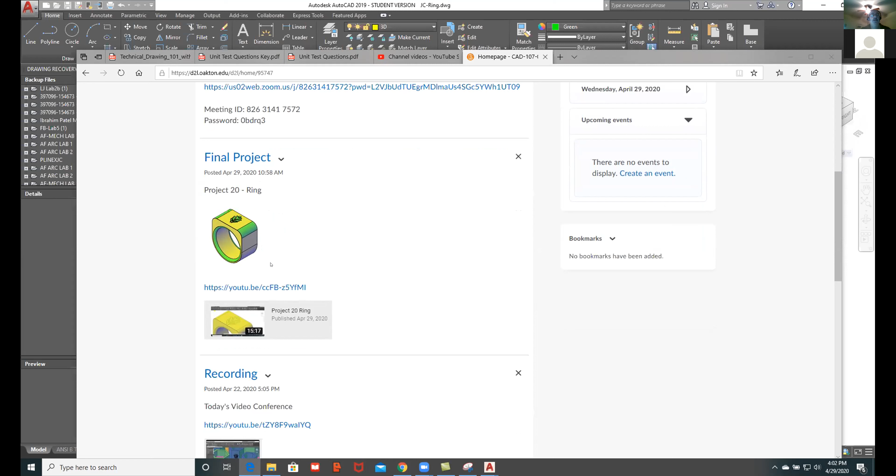We're working on this final project, project 20, the ring project from the 3D printing projects book. I've created a video for it, but I'll need to add one more part because I had a crash while showing how to put the logo on it—though it's not that difficult. I'll put a project file that students can work with for project 20, and add that after this video broadcast meeting.

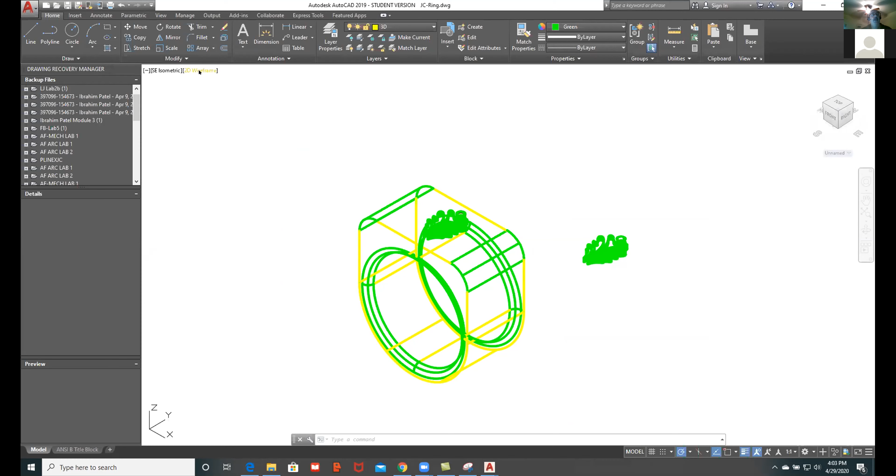If we look at the project itself, I'm using AutoCAD for it, and I'm going to put it back over into conceptual. That's kind of the finished project, and what I thought would be interesting would be to put an insert on it. So I'm going to have Alan talk about how to do an insert and slice that CAD model.

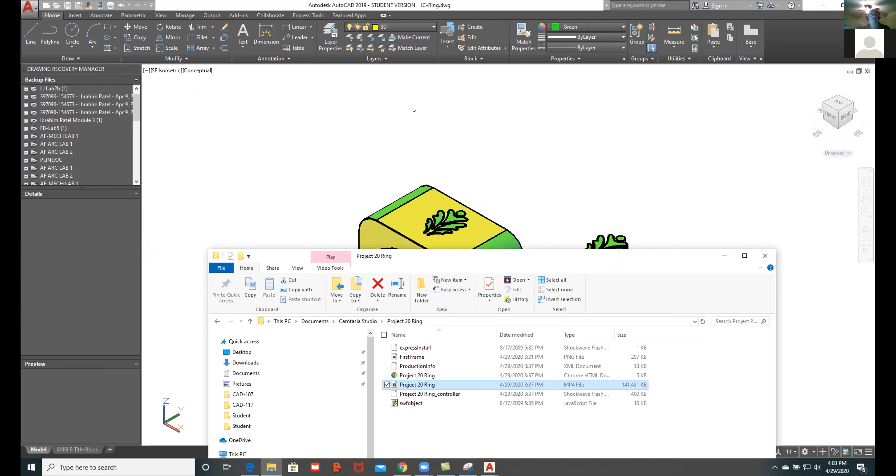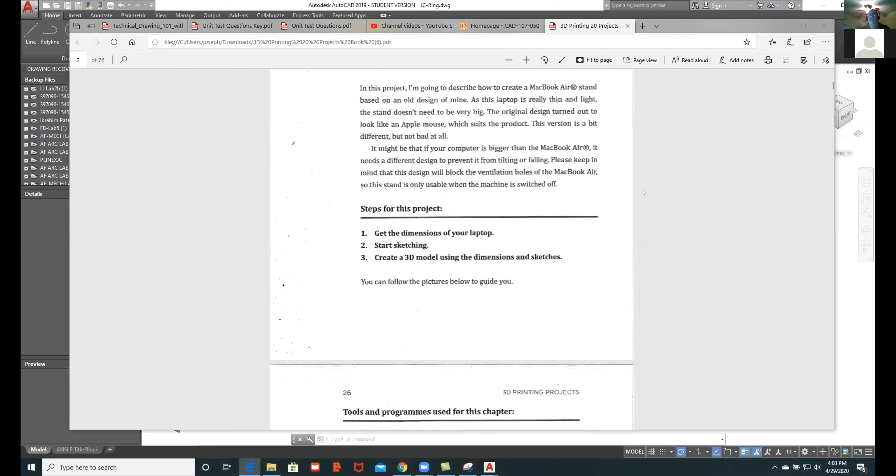So the way this one is set up, if we look at the curriculum for it—I'm going to have to go back and get it. So this is project number 20, and it's a real basic shape.

What I like about this project is that a lot of people use CAD for jewelry design. I've had a number of students—I guess it's not a lot, but a significant number of people doing that. Being able to use 3D printing is pretty cool too, though I think his design is a little too fundamental; it just looks like a giant Lego to me. But when you get into some of the other things, you can do some pretty cool stuff.

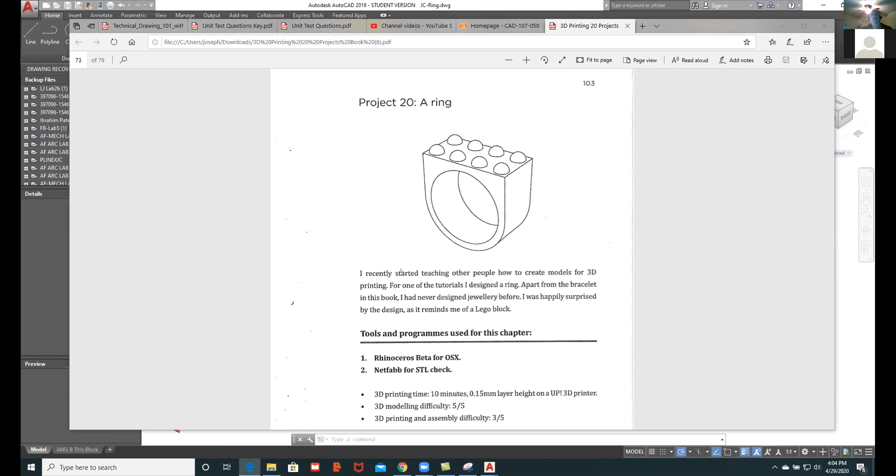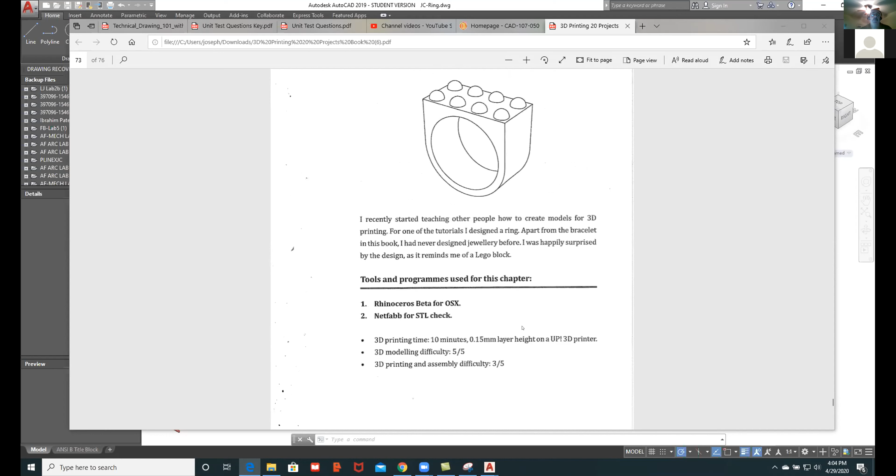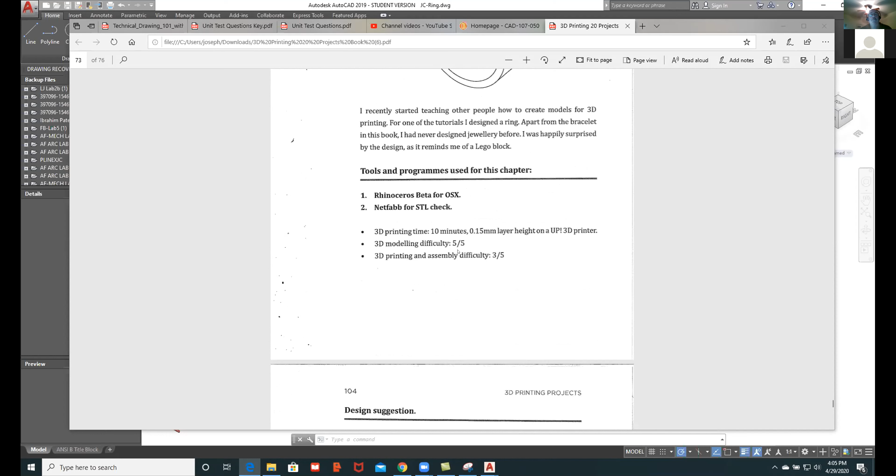He's using Rhino, which is a great software—they have industrial design applications for jewelry design, using CAD-CAM. Then he's using Netfabb for the STL, basically just printing it on a 3D printer with a rough resolution of 0.15 millimeters.

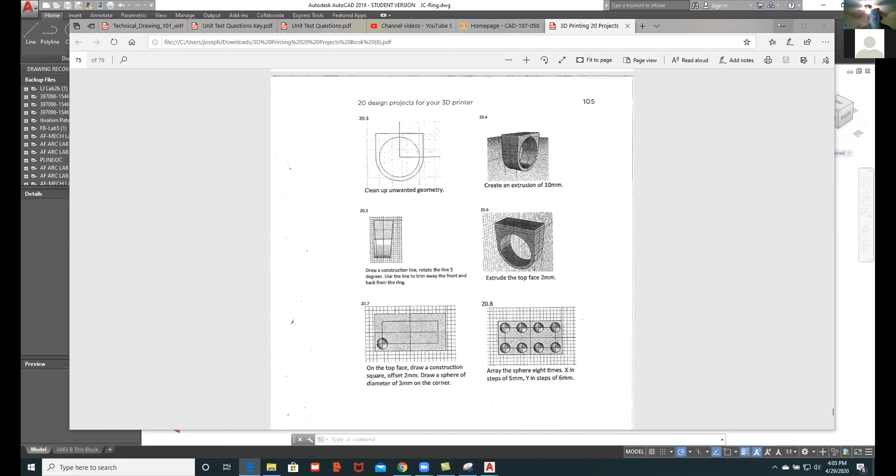What I've done is gone through and laid out how to do this with AutoCAD. I have an AutoCAD file here, and in this file I go through step by step like in the other videos. I'm going to turn off the conceptual view because I've had some bad luck today with the screen freezing. I just trace it back step by step until I get to the top view here—so here's the part.

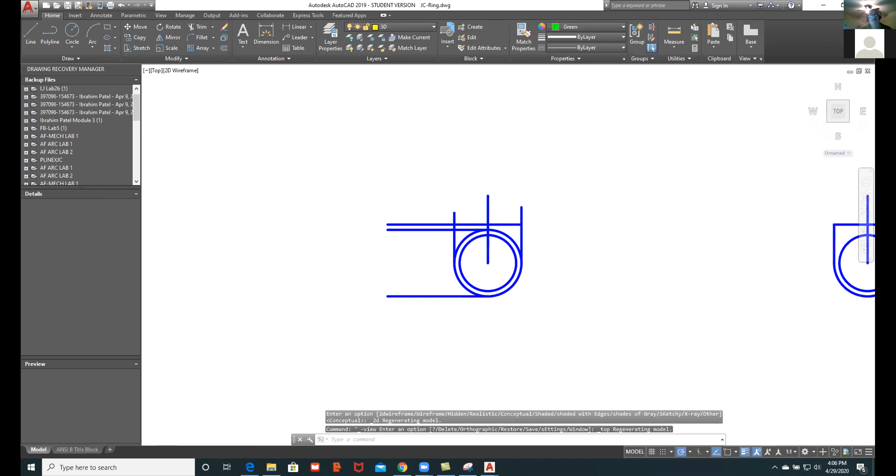If we look at the geometry, if I click here on one of these grips, you can see that's an 8 millimeter radius. And if I click here—let's see, I'm not sure if I updated my dim scale on this. No, I did not.

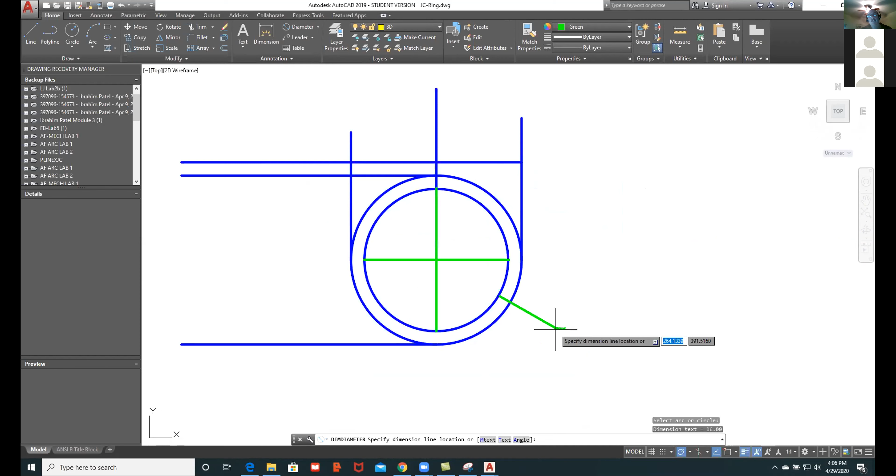A dim scale of about 7 on this metric drawing works very well, and that'll increase the text size so it's reasonable to see. So we have this 16 millimeter inside diameter, and then he offsets it 1.5 millimeters.

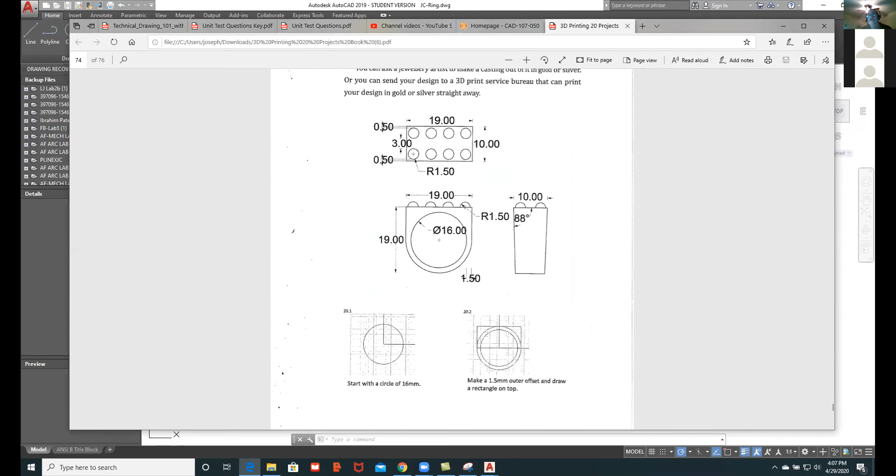Some of this is just a matter of being able to read his prints—1.5 millimeters. Then I just drew a couple of center lines and offset that to get this top edge. If I switch back over to my CAD and measure it, I found it wasn't quite tall enough—16, 17.5. Then going through to put a height measurement on this, I made it 1.5 millimeters taller.

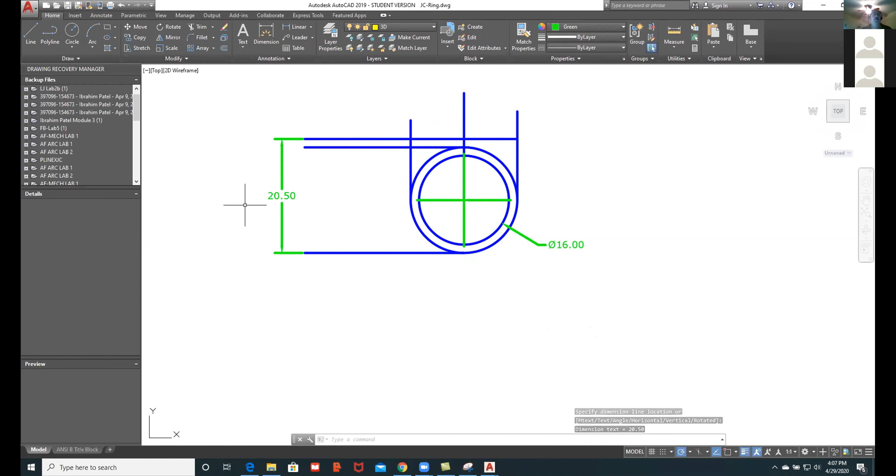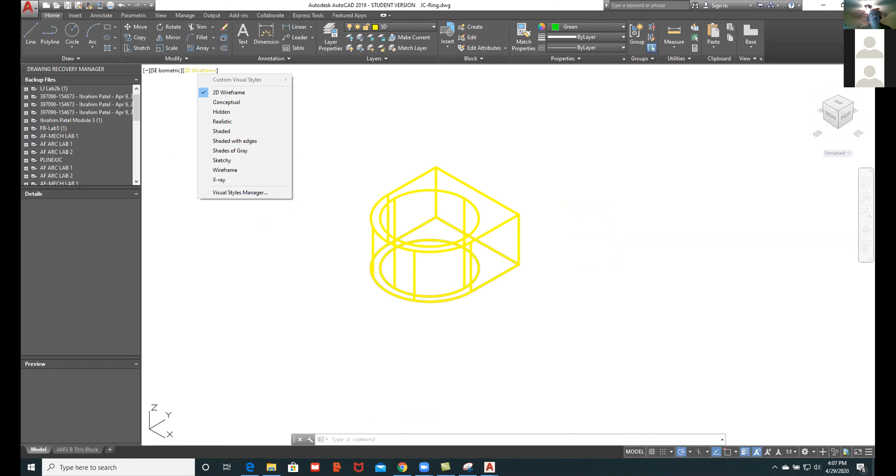So what you'll do is model it—I've got a YouTube video that shows how to do this, so I'm not going to do that in today's video brief. Once you have it trimmed, you can press-pull that shape, and then after it's press-pulled, 3D rotate it into this position.

Then what I did with it was put some radiuses on here. I use the 3D interface when I do modeling, so I'll switch over to 3D modeling. I'd enable the toolbar—show menu bar, tools, toolbars, AutoCAD—and I want the properties and the layers. They are in the ribbon, but they move them around.

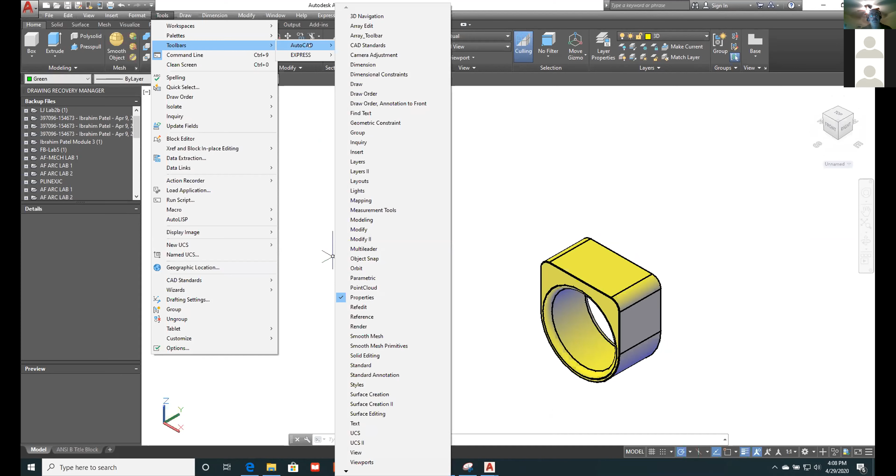I like to change and override the colors, so I'll override the color with something different. I put a fillet on this inside radius, and again, those are in the video. But the one thing I wasn't able to get was how to put in the oak leaf.

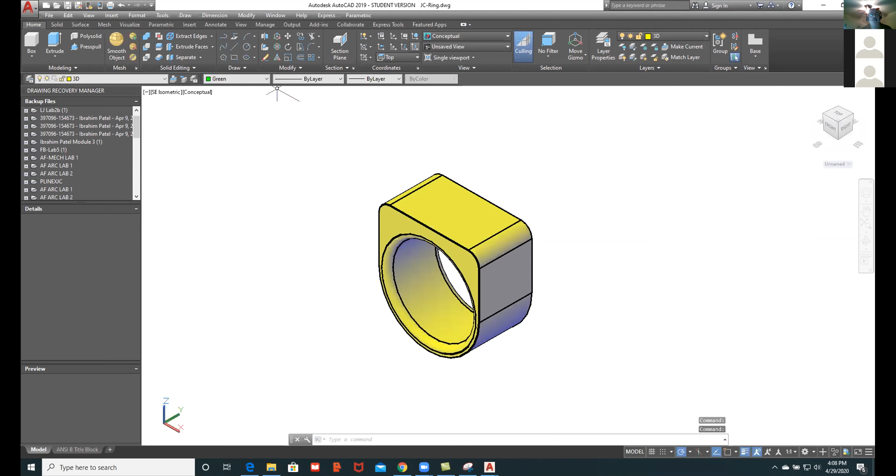So here's how you would put in the oak leaf. You would put a 3-point UCS on that, and then what you would do would be to insert the oak leaf. So I'm going to say insert. What that 3-point UCS is going to do is set the top of the part.

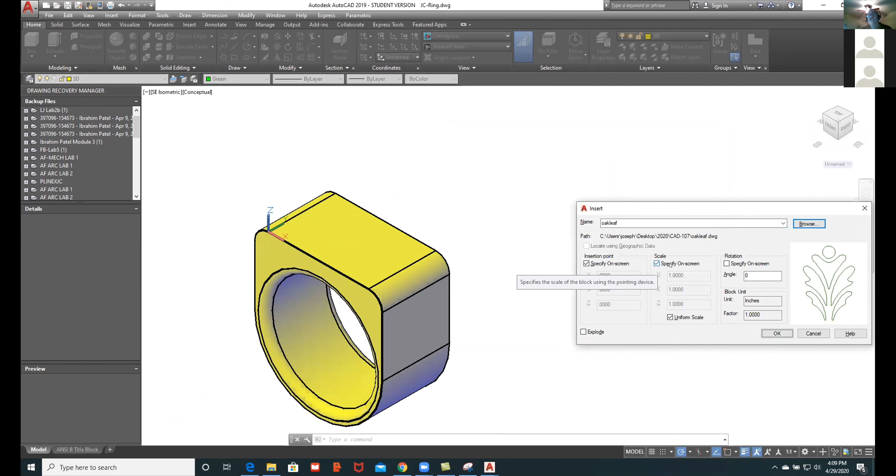So that we can draw on it. When I insert this, I'm going to specify the scale on screen and specify the insertion point. I'll say OK, and as I put it in, I'll place it right about here, and then blow it up to about that big.

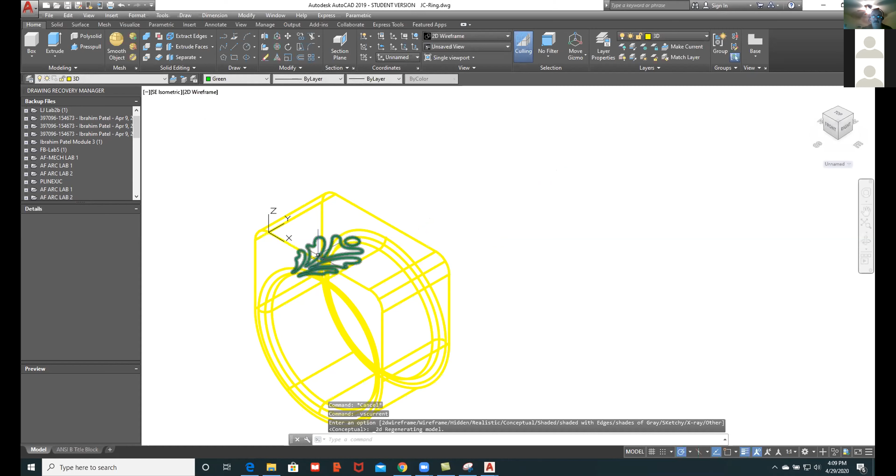Then I'm going to move it. I'm going to get out of conceptual view and move it. You want to move it while it's a block, because then all of them move together, and I can get a pretty good idea how that's going to fit.

It's a little big, so I'm going to scale it maybe 10% down so I have a little extra room, 0.9. Then I'm going to make a copy of it, so I'll say copy.

Copy this from here over to here. Now I can explode it so that I can do some 3D work. If you don't explode it, you won't be able to press pull it or extrude it.

With those exploded, I can press pull this down 0.5 millimeters, and then press pull this up 0.6 — I'm going to have it stick out a little bit. So if we go here and say press pull, highlight this, and go down 0.5, we'll continue with that.

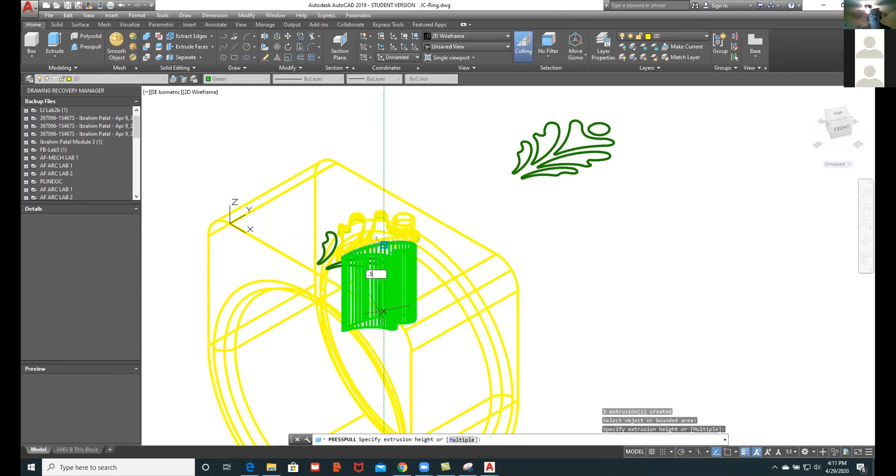You can see it consumes the sketch when it does that — the green leaf disappears. Then once I have that, I'm going to pull these ones up in the other direction. So I'm going to hit escape.

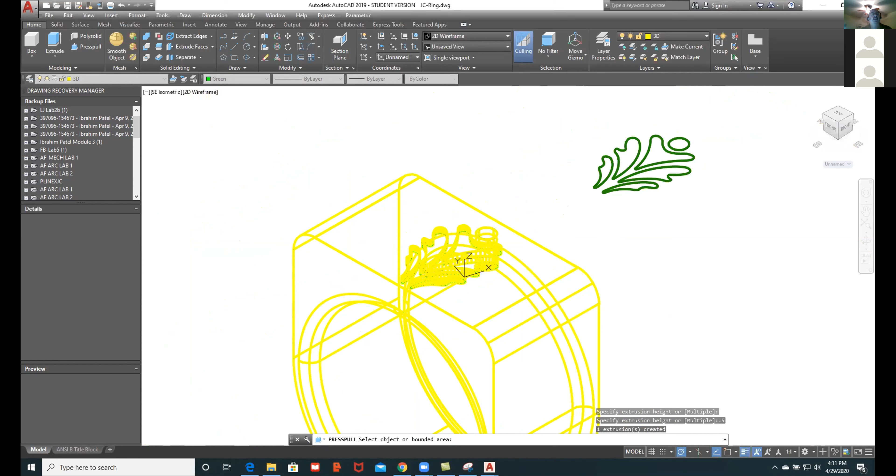I'm just going to extrude them rather than press pull them, because it's faster. I'll go up in this direction, and say 0.6, so I'm a little bit taller. Then you can just move this onto the part.

I'm going to take a risk here and try to do it. Well, actually, let's leave it in wireframe — famous last words. But what I can do then is just move this.

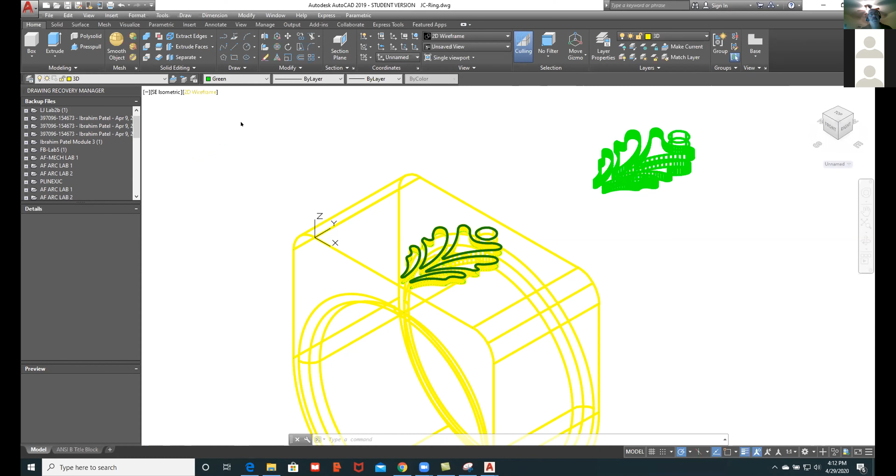Or let's make a copy of it, because when we 3D print these, I believe Alan is just going to bring this in and bring this. So rather than putting this on the part, I'm just going to show you, because I did this before already — so here's what it looks like.

Then we'll export that as an STL. So you'll come up here, I'm going to save this. And when you turn in your files, turn in the CAD file and the STL.

Then I'm going to export, other format, and I'm going to do 2 of them. This will be the ring, and then I'll do it again for the oak leaf.

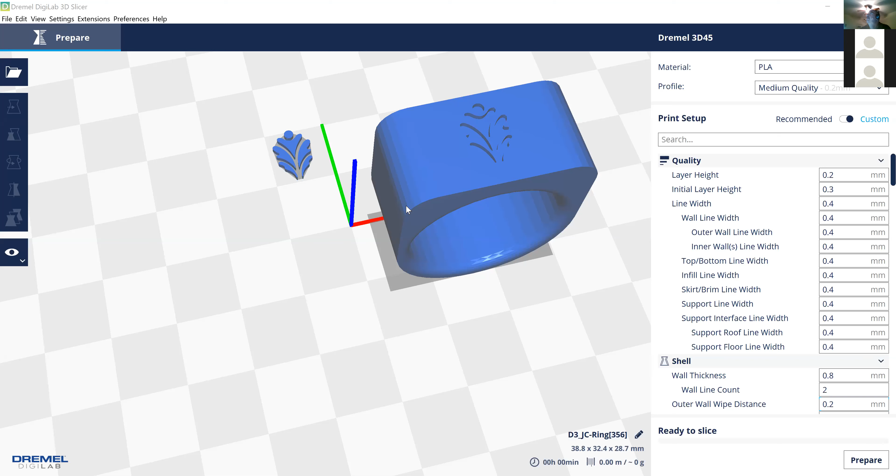Okay, terrific. So I'm going to just start from scratch. Really quick, I'm going to bring in the files that Joe made — he exported the ring and the logo separately. So I'm going to go ahead and bring in the ring and the logo for the ring.

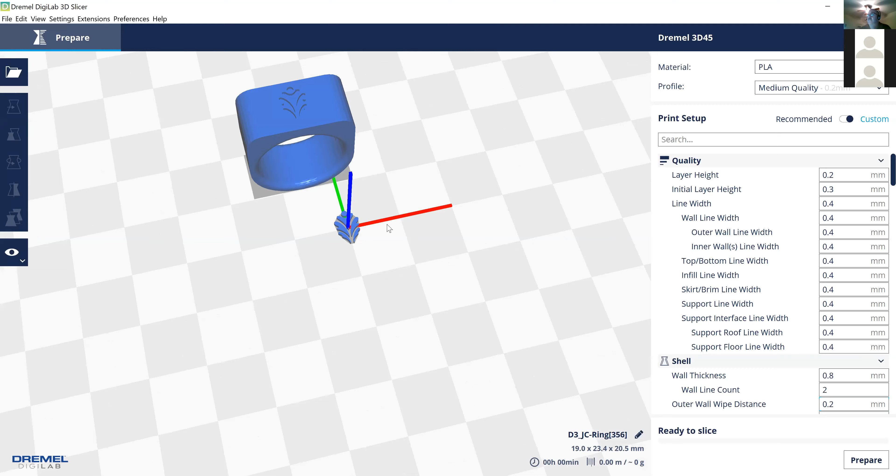We're just going to slice it, but before we do that, we want to make sure the ring is oriented with the face of it facing down on the bed. Otherwise, it's going to be real difficult to print.

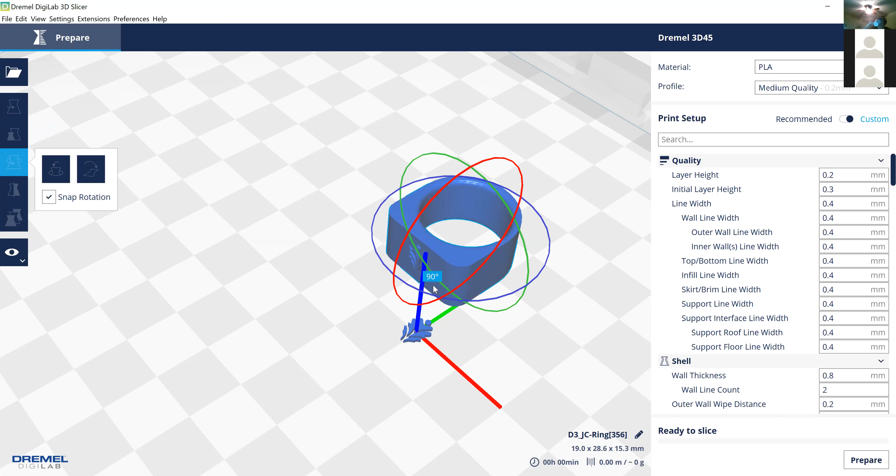Alternatively, you can print it facing like this, but you might have trouble getting the logo to fit as an insert. So I'm going to recommend everyone flip the rings and have them facing the bed. As a bonus, you're going to get a shiny side if it's on glass — any part that's touching the bed.

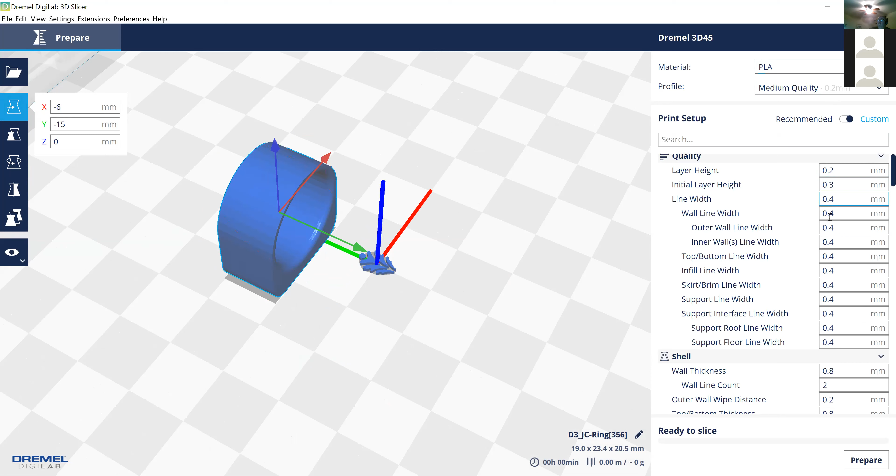With that being done, I'm going to see if I can move that down. Okay, so medium quality, whatever you guys choose, I recommend medium should be okay. Really quick, we're going to go through the settings — 2 walls should be sufficient. I'm going to turn off compensate wall overlaps, fill gaps between walls, nowhere.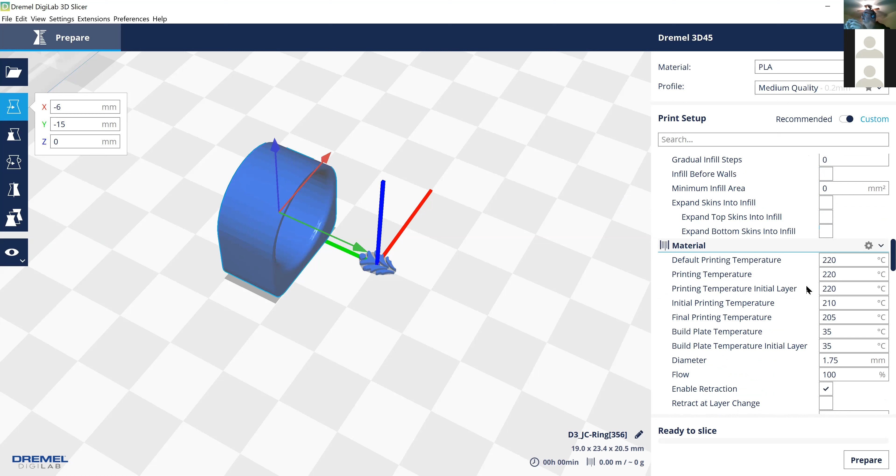20% should be fine. And this is PLA, however, you can choose whatever you'd like with regards to material. And that's a good point. We have some shiny metallic materials that we can print with also. Silk. Right. So there's 2 things we can do now.

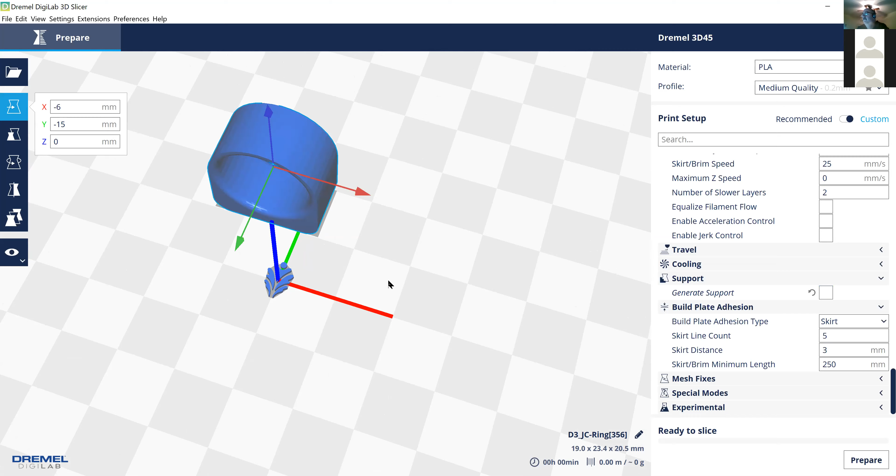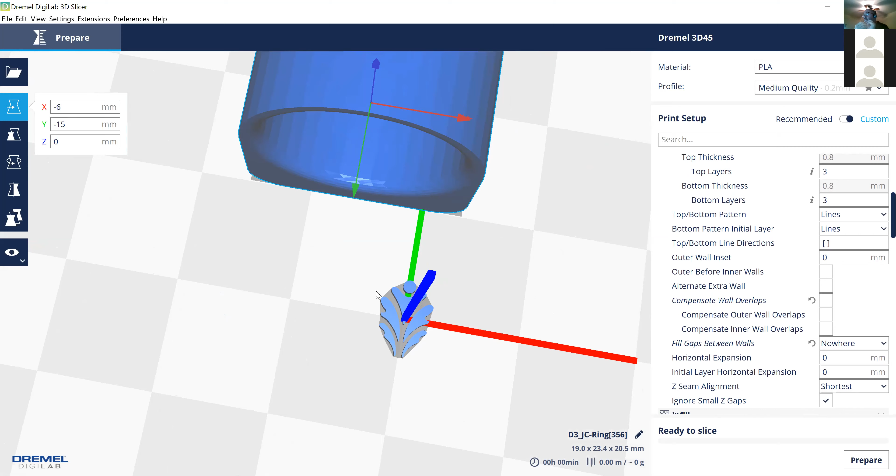We've talked about horizontal expansion in the past and how we've used it for inserts, and we typically reduce the size of the insert. In this case, the insert is going to be small, and since we're printing out the same material, if it's going to be printed on the same build plate, we can try using horizontal expansion, but this time instead of a value of negative 0.25, we can try something smaller like negative

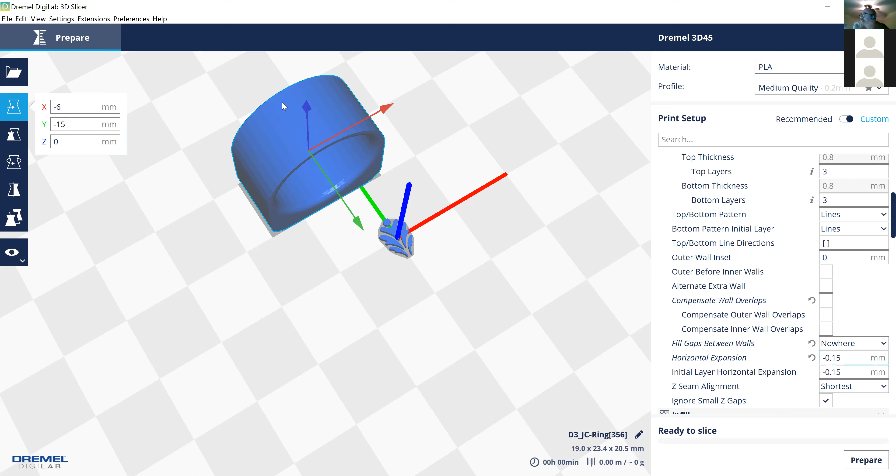0.15 or 0.10, because the idea this time is that both the ring main body and the insert are going to be shrunk evenly to allow the insert to fit in better. So a little bit different approach, but same strategy. We're gonna try horizontal expansion. So with that being done, I'm gonna go ahead and hit slice and see what happens. Let's go to our layers.

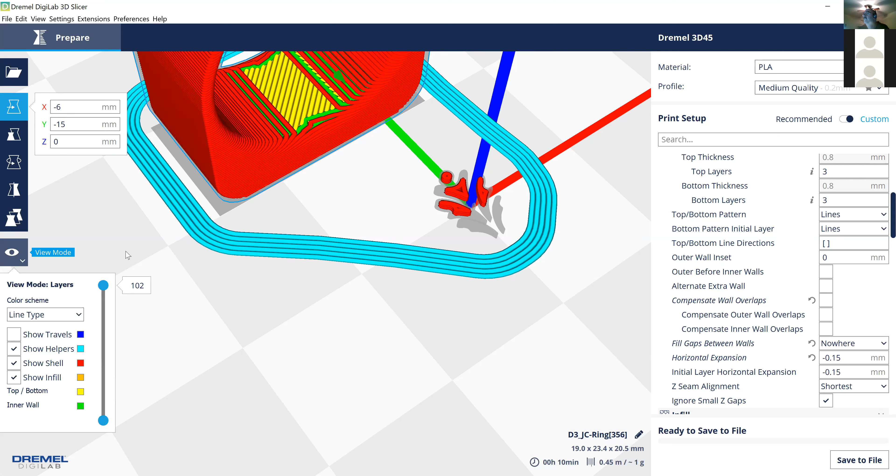So one thing I was kind of worried about is the insert is kind of small. So there's a couple of ways we can fix that, but the easiest way we're going to do it right now, instead of changing the model, is we can resize the ring, because at least for me, it doesn't even fit my finger until you get to 150. So really quick, I'm going to go ahead and do 150 on the ring, and then 150 on the insert, and then we're going to go ahead and slice it. And that should give us what we want to see.

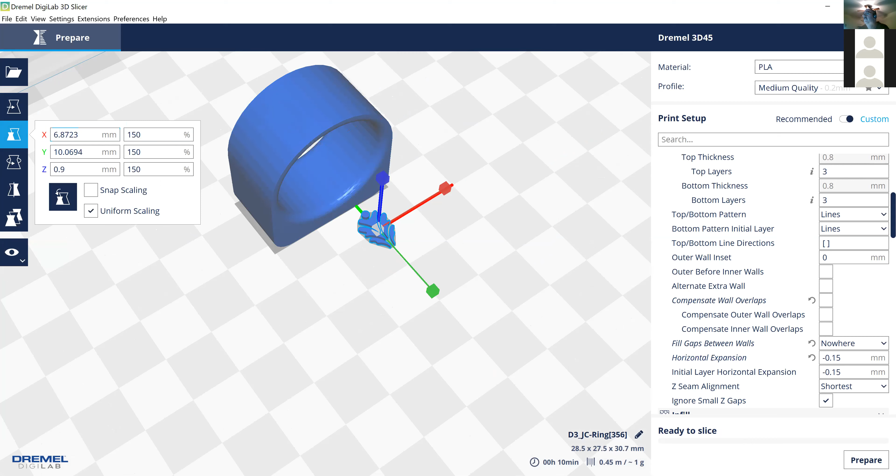We're going to go back to layers. So that's about as good as it's going to get. Either way, this will look fine once you insert it. So that's basically it. That's how we can get an insert into the ring, using horizontal expansion for both the ring and the insert in this situation.

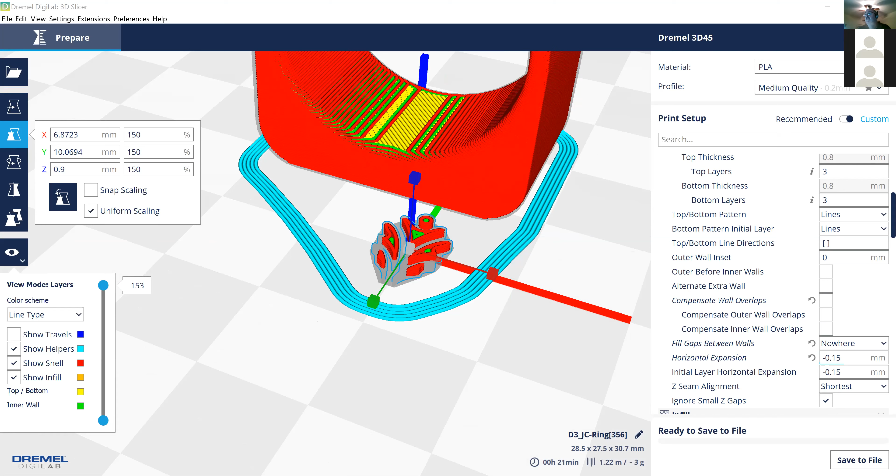Thanks, Alan. If you want to give me back the control. Yeah, let me figure out how to do that. Meeting controls. There we go. Stop share. Okay. Did it release? Yeah, I believe it did. So I'm going to end the recording.

This is the last project, and you don't need to do the slicing. We will do the slicing for you, and that way we can kind of test this out. One thing, Alan, we might want to try to do is to use one of the SLA printers, because they use a different type of resin. We might be able to get something kind of shiny as we look at that.

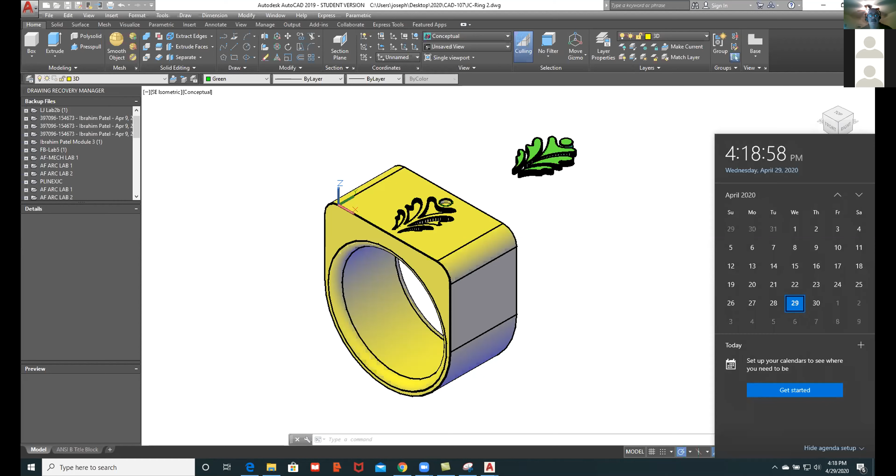But regardless, next week I will activate the final exam, and so on May 6th, I will activate the final exam for the 3D printing class. It's basically based on the textbook. And so the final exam will be a report on these different types of printing features. And so if we go to the D2L course shell, let me see if I have it.

And let's see here. Yeah, so at the present time, it's not shown for the students, but it will be a final exam, and it's going to be based on the textbook. I will post any information that you need for that, but essentially it's a take-home exam. It's going to ask you questions about different 3D printing applications.

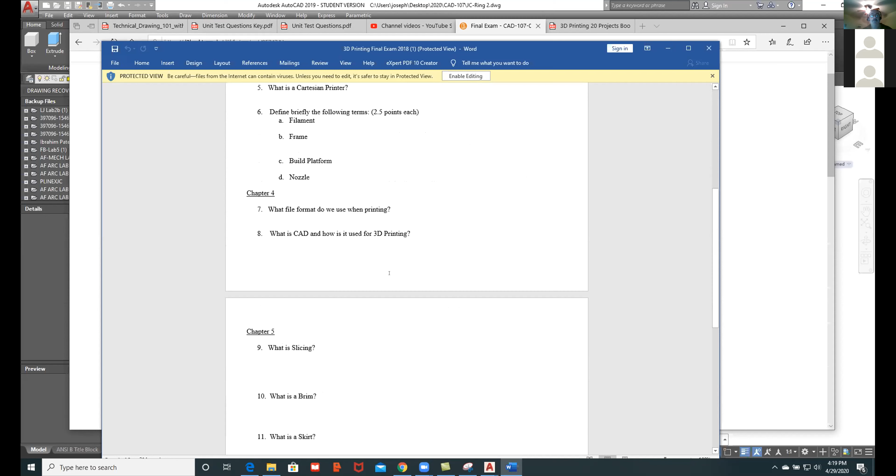So if we take the exam, what is FDM printing? What is SLA? And all of this is available in the textbook, and it's open book. And so your job is to complete this. I'll turn this on next week, and then actually I'll put it on at the end of today, and that way you have some additional time to do that.

This will be due no later than midnight on the 6th, and that'll give us kind of a mercy day. The last day is the 13th, and so I will set up the Dropbox so that the final exam is marked due on the 6th at 11:30 p.m. And then the 13th is the last day to turn in any projects. And so if you look at the assignments in the assignment sheets, it's pretty close. It has almost everything in the drop boxes, but I think I need to add one for today's assignment for the ring.